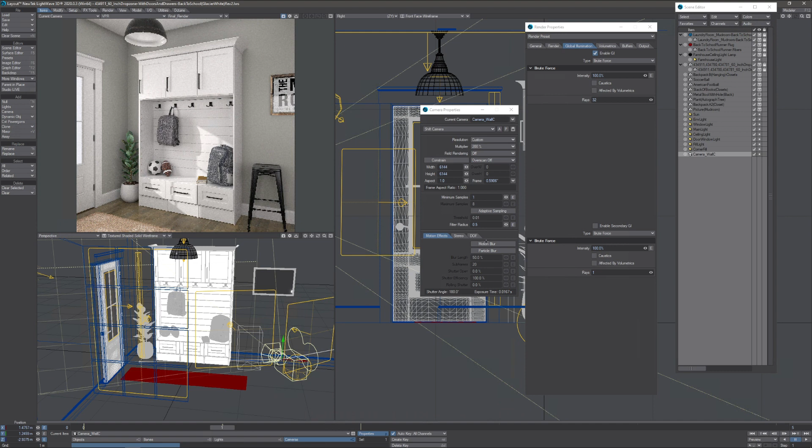Over the last few years, there's been a lot of complaints about the speed of LightWave's renderer, and I've complained enough about it myself. But I really like the look of it, I really like how the materials work and all that. So there's really a lot to like about it, with the exception of the speed. So what I want to do is share a recent project that I received. This isn't going to be any kind of tutorial, it's more a process that I used, and actually a lot of questions - about Irradiance cache, about GI in general, and about the AA sampling.

So this past Monday, I got a call that our sister company needed some photography for this cabinet - it's a mudroom cabinet that they're producing.

I'll show you the website right here. It's Solid Closets, and it's this product right here. They wanted some photography, or something similar along the lines of what they've already got. These I believe are renderings, third party, but they want to replace this image with something a little bit - it just doesn't seem to fit in, correct?

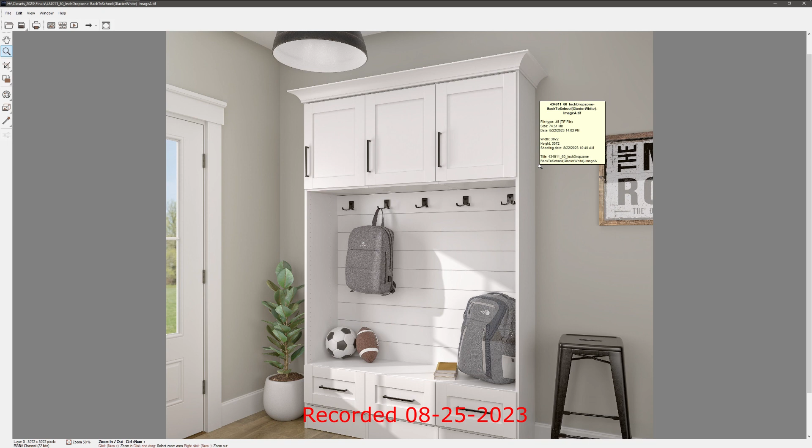As a matter of fact, this is a result. And what I did, as you can see from my camera samples here, I had one camera sample - 32 rays, brute force. Lights - every light I cranked up to 32 samples, every single one of them. And it really cleaned things up pretty good.

But in the end, what I did is, of course, I rendered out multiple buffers. I'm not a big buffer guy, I don't do a lot with buffers, but what I do use them for is masks. I don't do any animation, so this is a clean - bring it into Affinity Photo, use the mask if you need to do any kind of touch up on any of the pieces.

So basically what happened, I rendered out - it took 2 hours to render the 6K image, and I was fine with that. Um, and when I was done with that 6K rendering, surprisingly there was not that much noise. I was really surprised as to how little noise there was, with one camera sample.

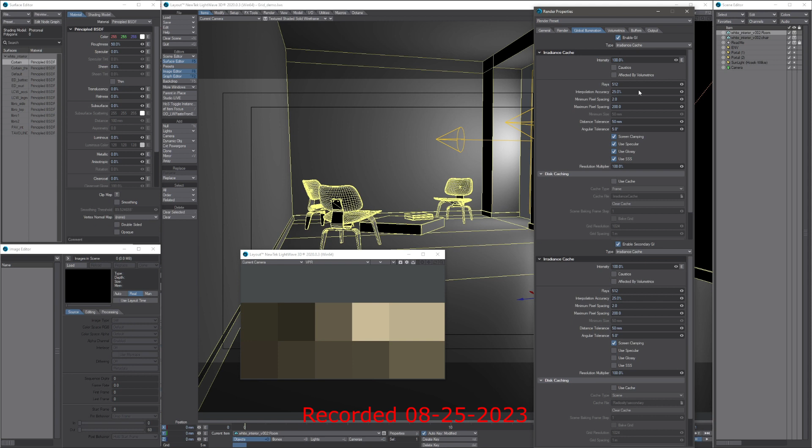So then I thought, well, I'm going to run some tests using these settings, which I think are just standard settings anytime you go from brute force to Irradiance cache. This is kind of what it gets. That's what was in his movie here. And maybe it was this movie here. But anyway...

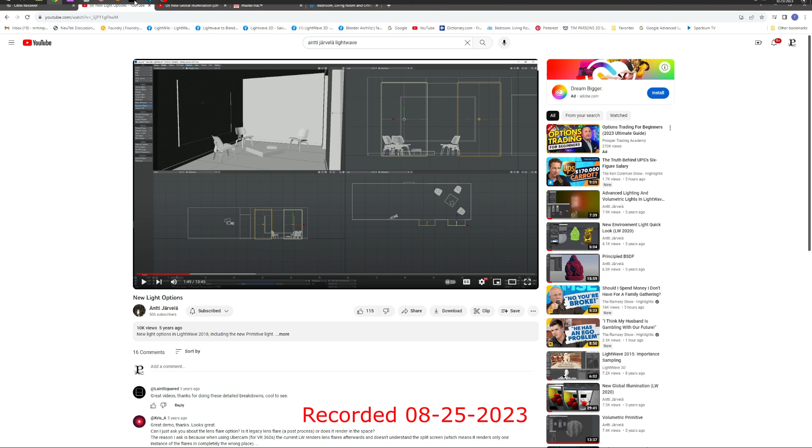So I did some tests on that scene, this scene here, and everything seemed pretty cool. So I did some tests on my scene, real world situation, and so here they are. Here's some of the tests.

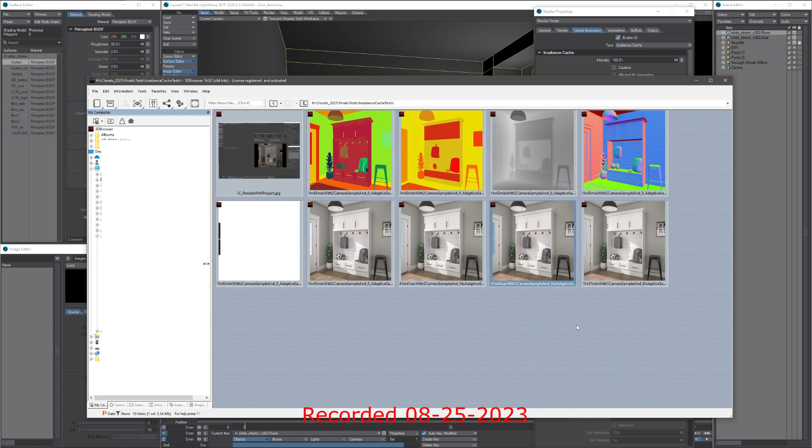Now, for the tests, I didn't want to do full 6144 by 6144. So I ran these. These were 3072, I believe, divide by 2. Yeah, 3072. And then I divided it again, so yeah, they were 1536 by 1536. That's what these were.

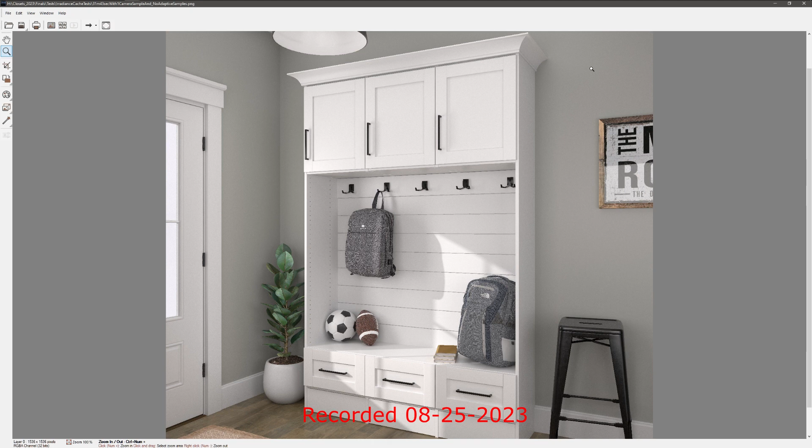So here was the first one I did, which was 31 minutes and 43 seconds with one camera sample and no adaptive samples. Okay, and if we go 100%, okay, not too bad. This isn't good, these obviously aren't good. I would have to crank the resolution up to clean some of this up. The noise is pretty decent, but still fairly noisy. Of course, this needs the AA big time, these lines across here.

So then on my next test, I added one camera sample with 8 adaptive samples, and it was 2 hours. So yeah, it cleaned up real nice, and you still get herringbone in through here, just not enough resolution for that. But 2 hours, in my previous work that I just shared with you, 6K, that took 2 hours. So there was no gain, in my opinion, here.

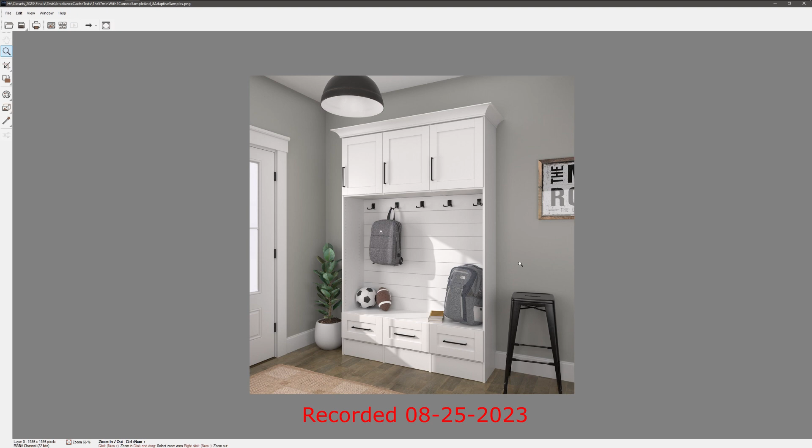So that's kind of a, so I thought, well, let's try no adaptive samples and 2 camera samples, and that did a pretty nice job. Here I'm at 200%, you still need some AA here. Let's go down to 100. There's still anti-aliasing here that needs to be worked on, but overall it wasn't bad. And they probably would have been okay with something like this, even the previous one.

So then my next step was to do, what was it here? Oh, I think I upped it. Yeah, I upped the resolution on this to 2048 by 2048 with 2 camera samples.

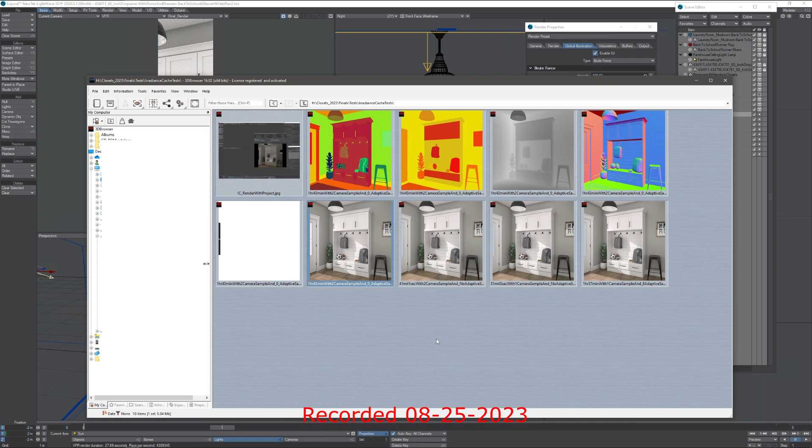And no adaptive sampling. That helped with the AA on these lines here, and it helped a little bit with the moire patterns and whatnot in the fabric. It's fairly clean, as you know. I would still probably run it through some kind of noise cleaner to clean it up, but it wasn't too bad.

So anyway, then I thought, well, let me run this original scene back at the regular resolution with Irradiance cache and the secondary GI with Irradiance cache. Let's see what that can do. Maybe miracles.

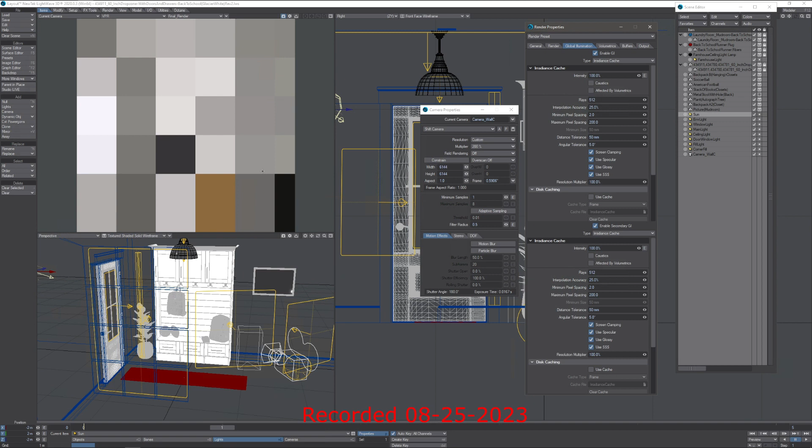That can really clean things up. Won't need to do any of the cleanup with any denoise or anything like that, because actually my experience with doing limited region rendering, it does a very good job of cleaning things up, and you get a pretty noise free render. So I hit the render button and just kind of let it go.

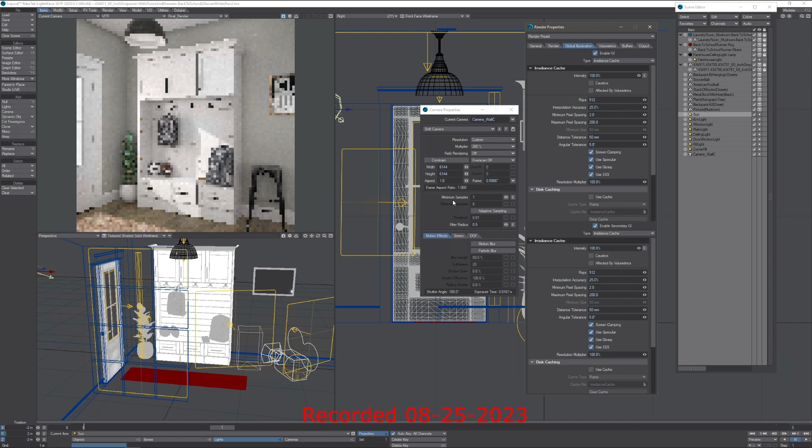As you can see, I stopped the rendering at 11 hours and 14 minutes, and this was the second pass, the second pre-process pass. The first one took 1 hour and 52 minutes. Now it's working on the second one. You can see right here where it's working through this.

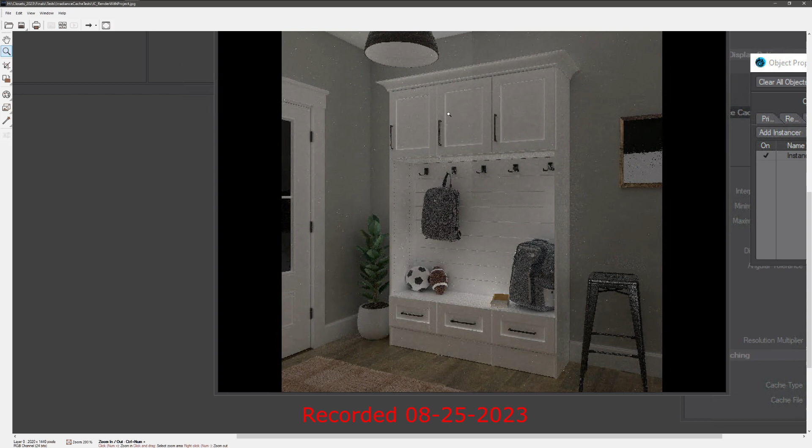You can see how it's just a little bit lighter than this area over here. It hasn't calculated the time remaining, but we all know that's pretty meaningless until the frame gets to be about 30, 40, 50% done. But at 11 hours, 14 minutes already, what's the point? So yeah, I killed it.

So part of my question is why does this Irradiance cache exist when it doesn't really seem to work? Again, the results on a smaller image looked very positive. It looked like it would really do the trick. And if you can bake out some of that stuff and get some animations in, fine. I don't really do any animations, so that's no interest to me. The baking aspect of it, I don't really want to mess around with that. Don't need to.

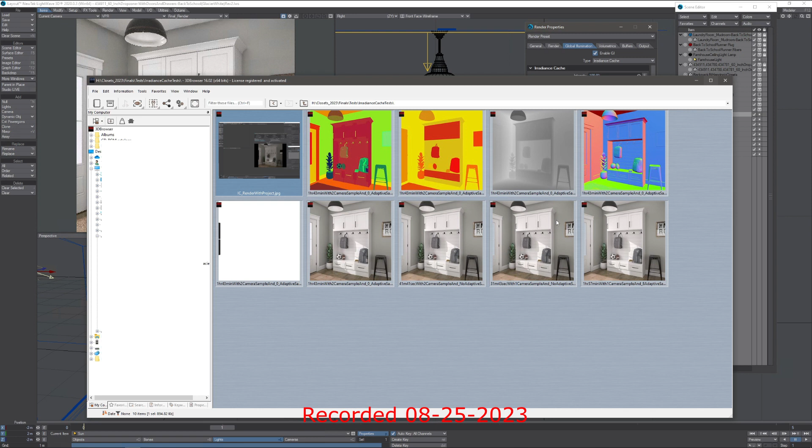And I'm sure subsequent renders probably would be better, but I'm doing one shot, one image. So yeah, overall the project turned out well. I was happy with the way things turned out, and obviously the customers have been too. I actually provided them with two images. I had enough time based on the work, so I gave them two images, and they're going to use them both. So yeah, in a nutshell, that's some of the process that I use to get some of this stuff done.

But it's also a big question as to why doesn't this stuff, why isn't it faster? Why doesn't the Irradiance cache really help? Brute force - I just go back to my tests that I did when 2023 first came out. Irradiance cache just does not seem to really help or do any good in any of my tests. Some of this stuff here that I did over the last couple of days kind of confirmed that. What's the point? So it might be the latest technology. Well, okay, it may be, but the results don't seem to be there.

And then the whole AA thing in general - it seems to me like if you go back to doing the old school way of doing things, where back in the day we would render at a super high resolution, way bigger than what we needed, with very low settings in your camera samples AA, and scale it down. As you can see in these shots here, if I go at 100%, it's pretty darn clean. And AA is really not a concern.

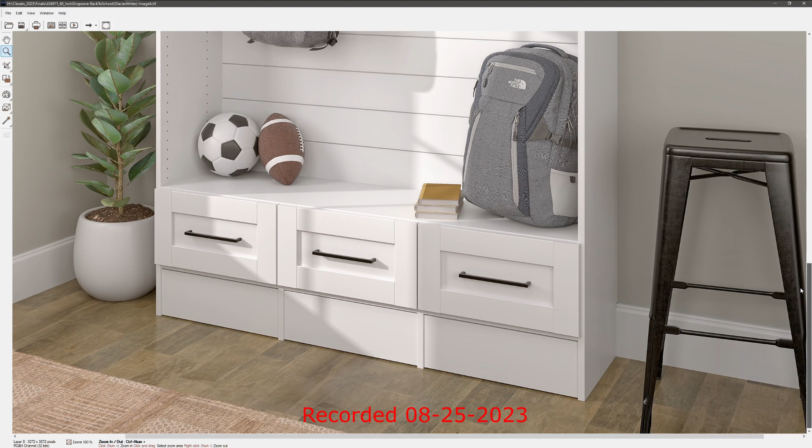Football didn't come out the greatest, but hey, they were happy. So I guess in the end, if your client's happy, you can be happy. But I would like to see in future versions of Lightwave that we need to speed up this render engine. It's really a good looking render engine. It does really good work.

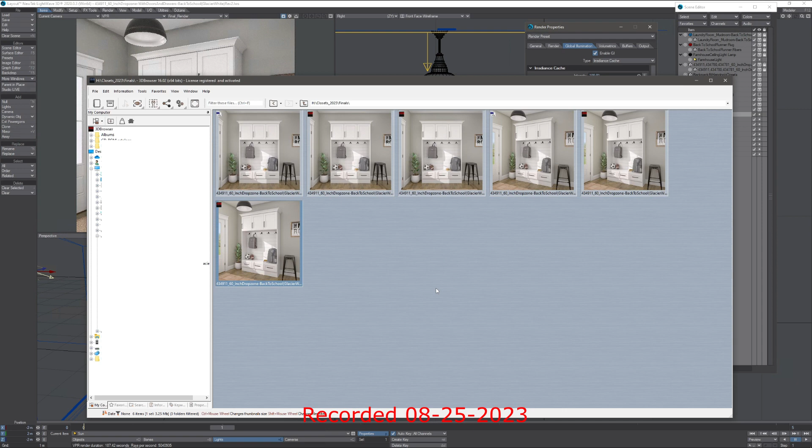There's hardly any post work in this. It's pretty much right out of the render engine. I add a little background here in Affinity Photo, and did some curve adjustments, and basically that's about it. So very little post work, and again, if your client is happy, that's all you can ask for, right?

So I don't know if this has helped anybody, or if somebody would like to comment and help me, that'd be much appreciated. Why is it the way it is? Why is the IC, Irradiance cache, the way it is? Why doesn't it really seem to work that well? Why does it seem to slow things down to a crawl? I think in theory it seems like a great thing, but in reality it appears to not be of much use.

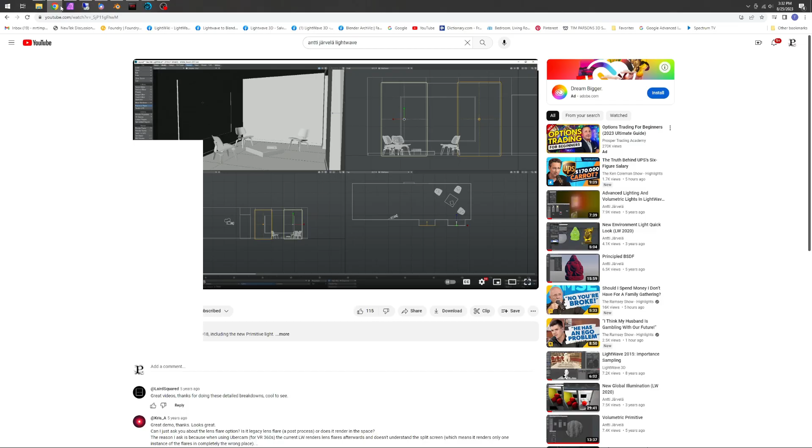So anyway, that's kind of my rant and kind of a backstory to my project, and hopefully in the future we'll see a new image put in here on their website. So thanks for listening, and any comments would be appreciated as to what I've shown, and what can be done in the future to get LightWave's render engine up to speed. Thanks so much.